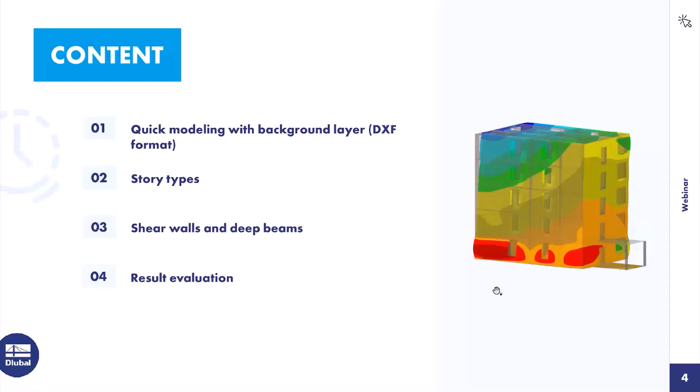Okay, then to our first chapter, the quick modeling, here with a background layer for an easier way. I will import a DXF file, and it's a modeling option from bird's view, floor plan, top view, however you want to call it.

At the time we have added this button in the building model add-on. It's an exclusive button, and you can see the objects you can generate or model in this bird's eye view.

So then let's switch to RFEM 6, then I can show you what I mean. I start a new model. Let's call it a building model. And at first we must activate the add-ons, of course the building model.

And today also the concrete design, so I can show you the configurations and special options which are connected with the building model add-on when the concrete add-on is activated.

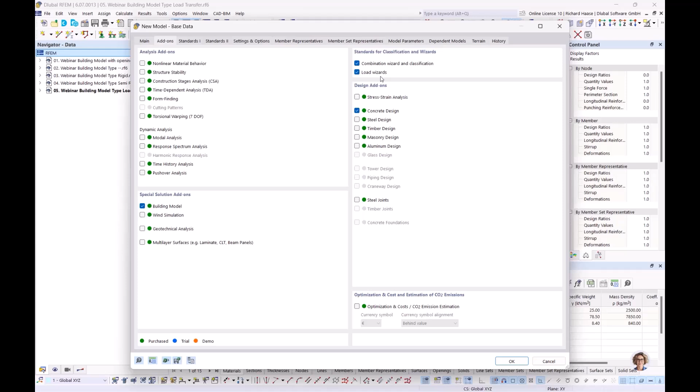And for the quick modeling, I also want to show you our load wizards. For this today we want to choose the German annex.

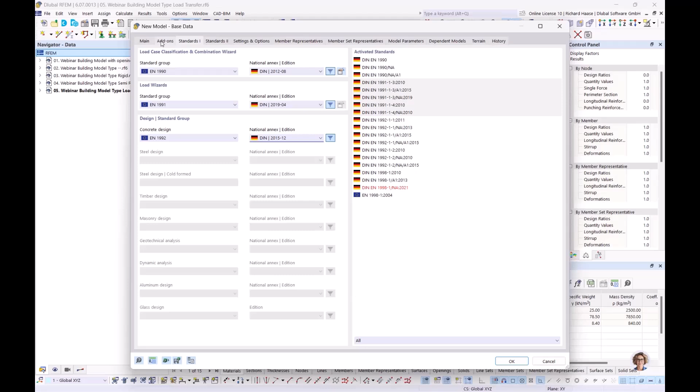Okay, so when you activate the building model, automatically here under settings and options, our surface cells are activated, and this is a nice feature for surfaces which are, let's say, separated by lines or different parts, and you can control and modify the surface cells. But yeah, I will show you. So okay, then let's start with the new model.

Okay, then let's delete all objects so that we really have a new model. Let's start with the materials. There I need a concrete at first.

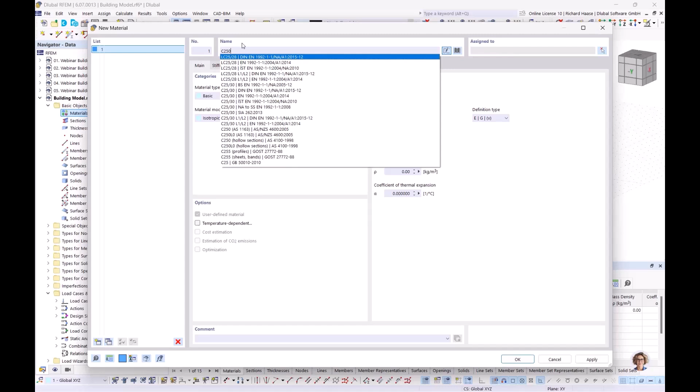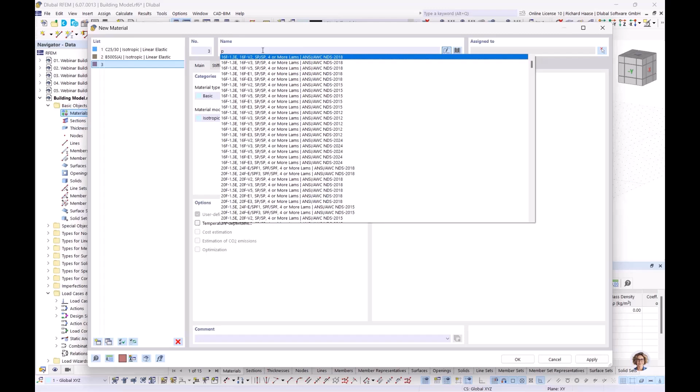Let's take C25/30. Then we need reinforced steel, let's take B500. Okay, and also we need masonry, there let's take... okay, this one. Okay, then we have defined our materials.

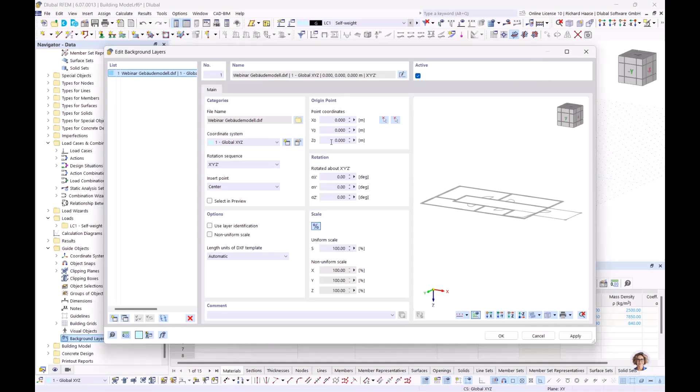Yeah, and okay, then I will upload my DXF file, my background layer, so I can show you what this building is about or how it looks like. Okay, and now we see it's nothing big. It's a simple model, but yeah, for this case it's good.

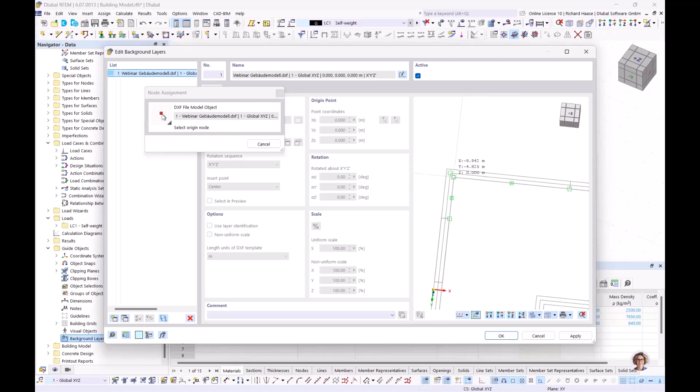Then let's change to meter. And when you add some background layers, you have here two selecting points. The first you can choose, I will set it here to the zero point, and the second you can choose in your DXF file. I added here some statical system lines. I will choose this line for this.

Now we have our DXF background layer, and the walls on the outside should be in masonry, and the inner side walls I will create in concrete. Also this slab, not really cantilever, but it's only in the ground floor. And here we have some columns.

So then let's go back to our definitions at the beginning. Materials we have defined. Now let's define our section. For the column, it's concrete. And now I will show you also a nice feature.

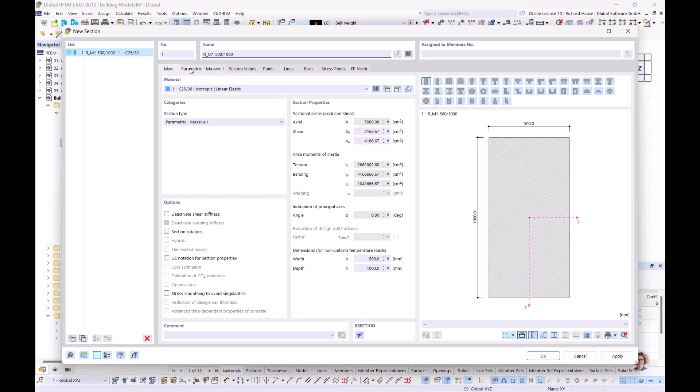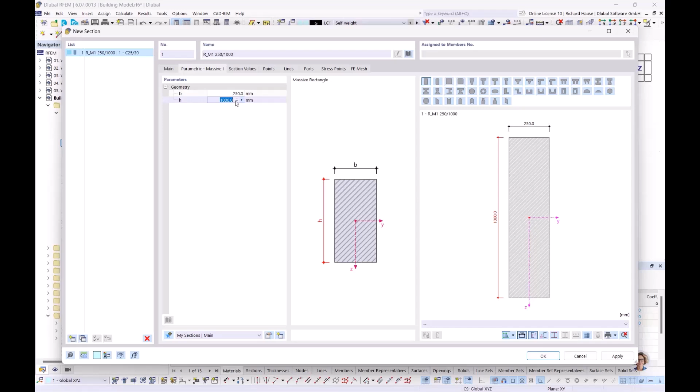When you work with your DXF file, you have the option to measure the properties of the section. So let's take this - 25 centimeter, and also in the other side, also 25. Okay, then let's say okay.

And now we need some thicknesses. So maybe let's start with the masonry walls. And also we have here the same type. Okay, then let's choose this 24.

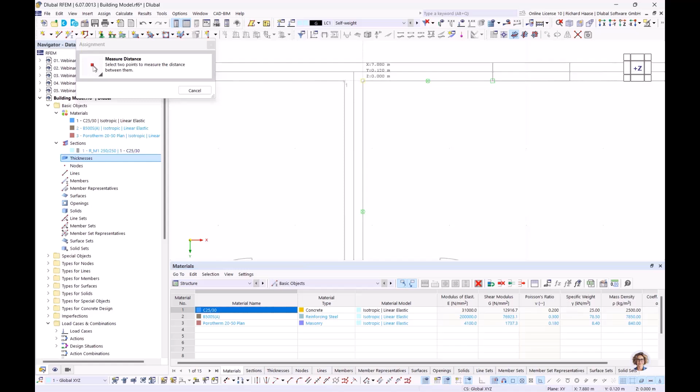For the walls on the inner side with the concrete material, we can do here best way 24. And for the foundation plate, let's say we want to have a thickness of 35 centimeter. Okay, then let's say okay.

So we have defined the materials, the section, the thickness, and now let's go here. Then we must switch to the building model add-on, and we will define now our building stories.

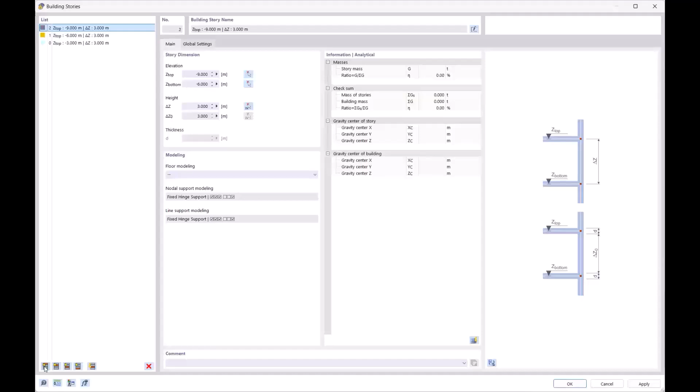Wait, I want to - okay, a new one with a height of 3 meters. And now again 4. And yeah, you also can model at first, but because of this fast modeling, you need to define the stories at first.

And you can switch here, and now you see story heights here. And here are the floor modeling options, but I will show you at a later point. So now we have our materials, our sections and thicknesses, and defined our stories. And now we can start to define with the fast modeling.

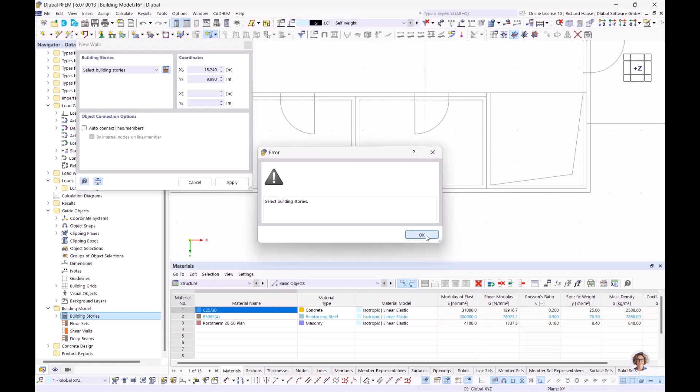So let's start with the walls. Let's take here our masonry material. Oh, yeah, right - for this, you need to define the stories. So you can choose if you want these walls in this example only on one floor or on different floors, or in our case, we want to have these walls in all stories. Then apply, and let's start.

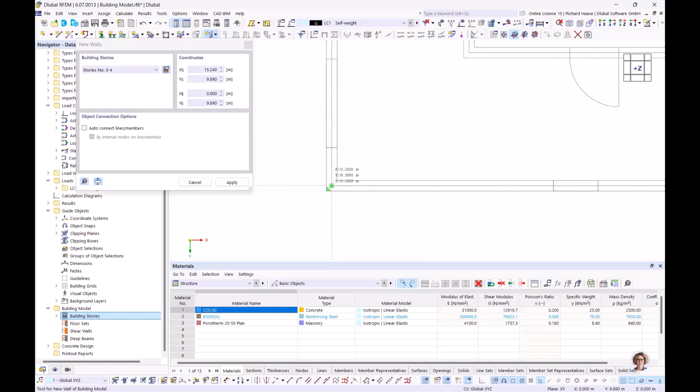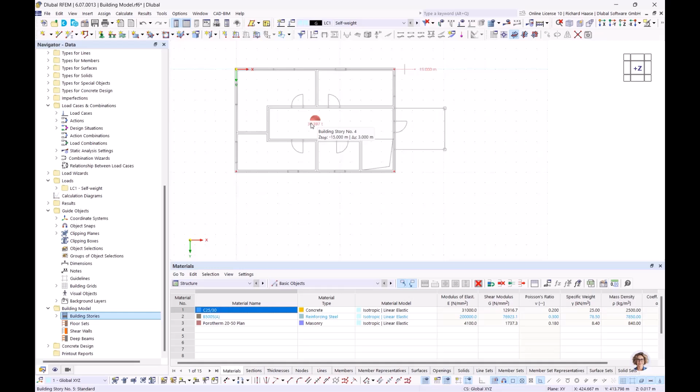So now you see here this mass, and it's also because of the building model add-on. The add-on now creates a center of mass, and now all these masonry walls are added with their mass, for each story. So you see now all outside walls are created, but let's continue with the inside walls.

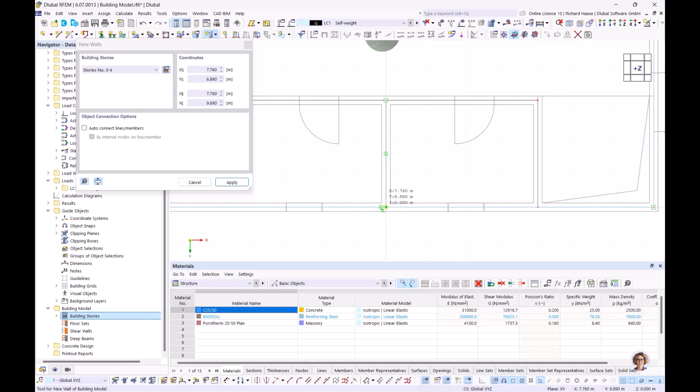24, yeah. Okay, here and here. Here and here. And the last one is here. Okay, let's check if I get all walls. Yeah, it looks good.

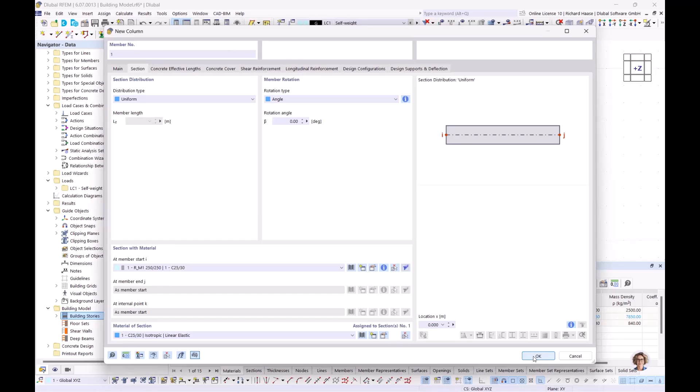Okay, then we want to define our columns with our section we have defined before. And now we don't want it in all stories, only in the ground floor. Apply and click here and click there.

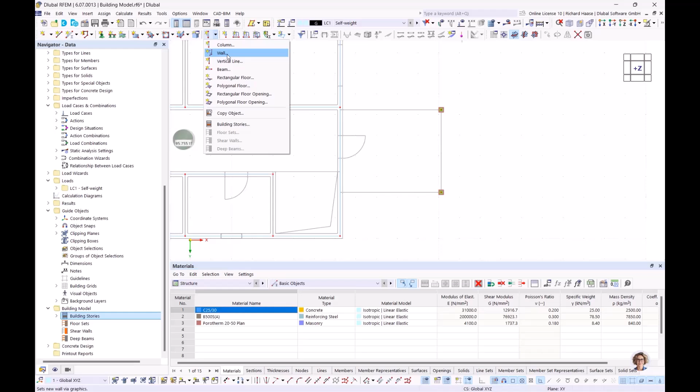Okay, then same procedure for the floors. So 24, okay. And for all stories, apply. Oh, a moment, that's wrong.

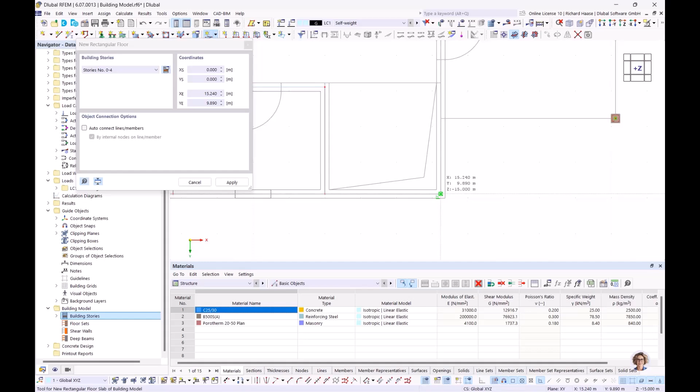Okay, again - floor for all and apply. And yeah, okay, now we have also floors.

Now we need this cantilever floor. Okay, also 25 and only in the ground floor. Let's start at this point.

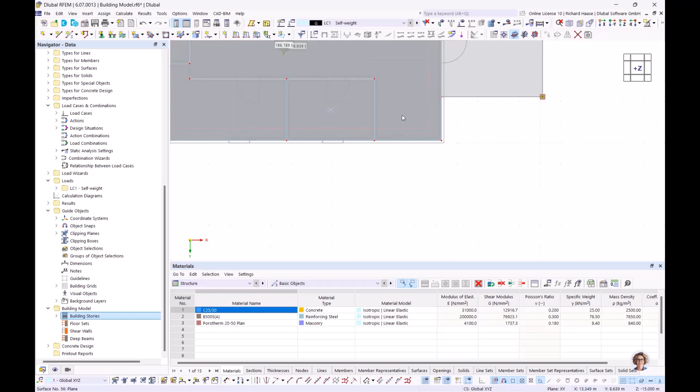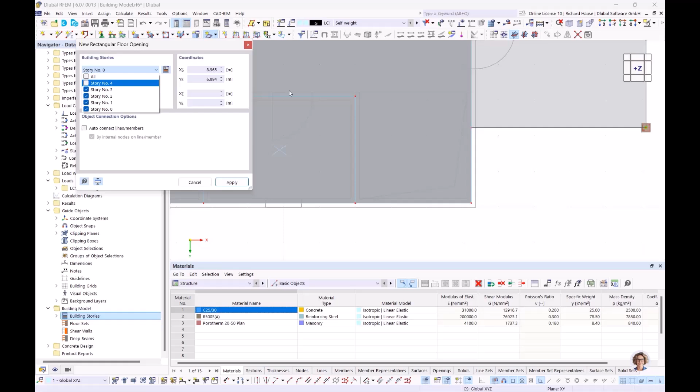And here we have an opening in the floors for stairs. And let's define this floor opening. Here, let's see, not in the last floor. And okay.

Okay, so now we have our openings, and you see you have in a short time generated a building. The only thing you must generate manually are the openings - the windows and the doors, for example, or other openings in the building.

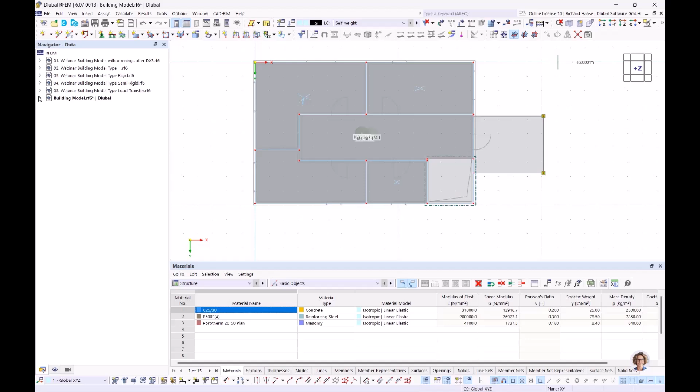And to not waste time, I have modeled this here. Maybe I can switch back to the full model. And there you see the openings.

And I added also some load transfer surfaces, because imagine when you define wind loads and you define it only on the masonry surfaces, these areas for a closed model are missing at the end. So you can define these load transfer surfaces, and these surfaces only transfer the loads to the sides, and don't have a stiffness effect or such thing, only for load transfer.

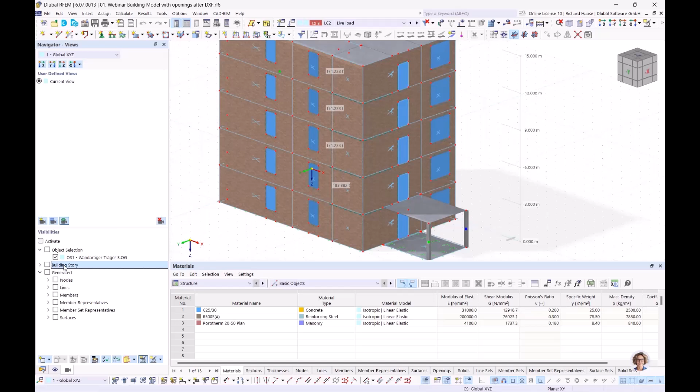Okay, then another nice feature which the building model makes automatically is in the navigator views. There is a point Building Story, and when you activate this, you see every story you define automatically creates a view, so you can fast switch between the stories for loads and such things, and I find it's a very nice feature.

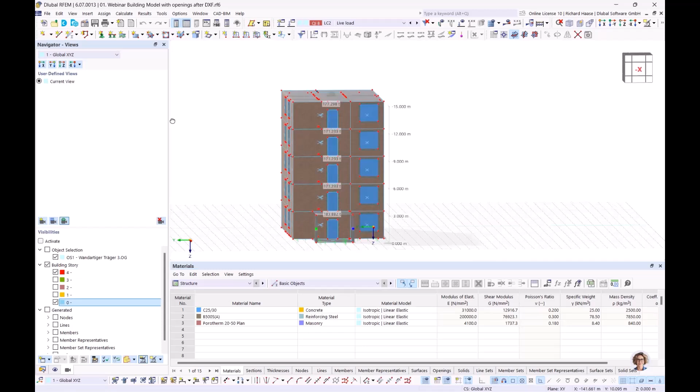Okay, then what I want to show you also - for example here you see it's one big wall, and you see these blue crosses. Wait, maybe we change the view. Oh, it's not functioning how I want it.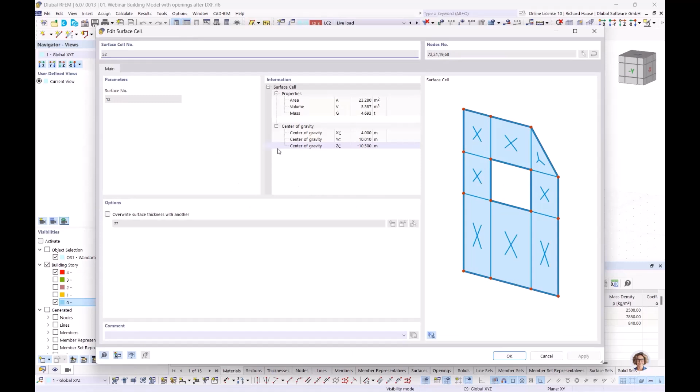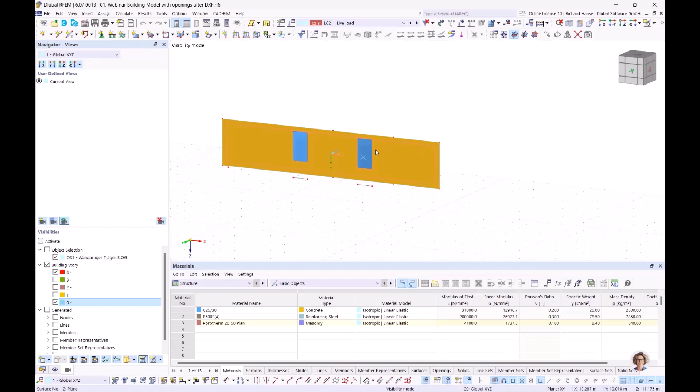Yeah, you have only one big surface, and with these surface cells you have the option, when you click on the surface cell, to give these cells other thicknesses. Then with the different thicknesses you can also design the surface as one surface, so it's nearly the same effect as with the surface sets, but it's an easier and faster way to define this here.

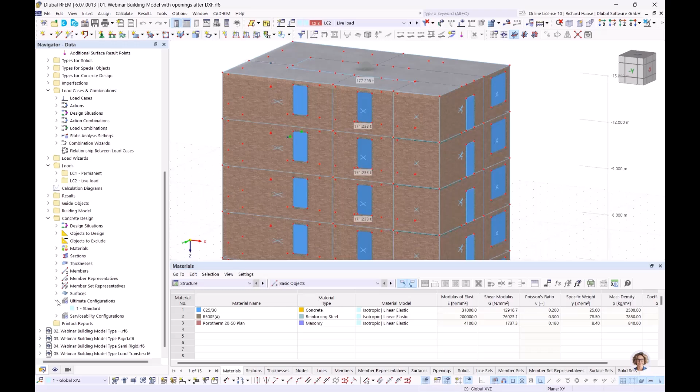Okay, then I want to show you the concrete design. When you activate the Building Model add-on and also Concrete Design, you find in the configurations some additional points which are only possible with this add-on. Here are some options for the deep beams and for the shear walls. So that's now possible.

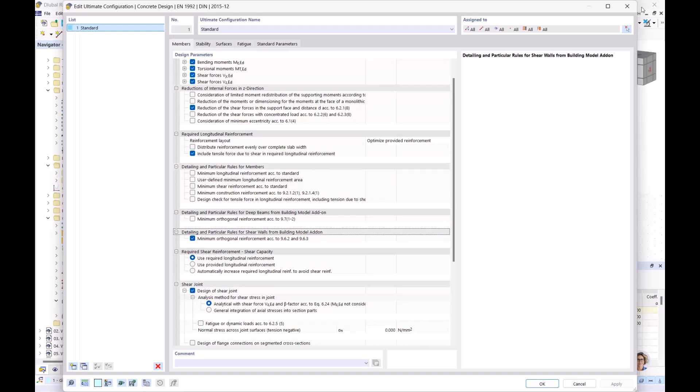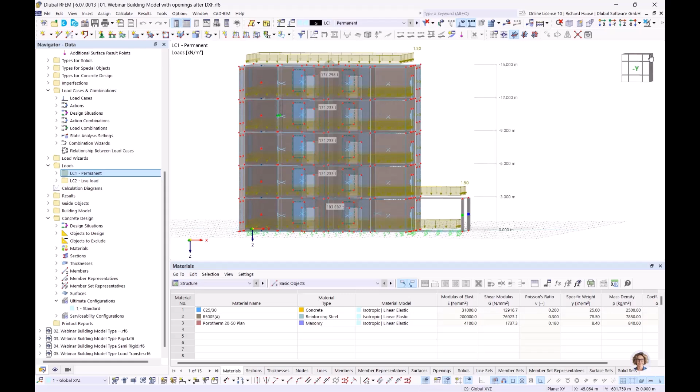Okay, then, as I told you before, maybe we switch to the loads. Sorry. Here we have some permanent loads, nothing special, and here some live loads. And now I want to show you the easy way to define wind loads with our load wizard. We find this here, for example our wind loads, and we have a flat roof, and now we want to find the base corners.

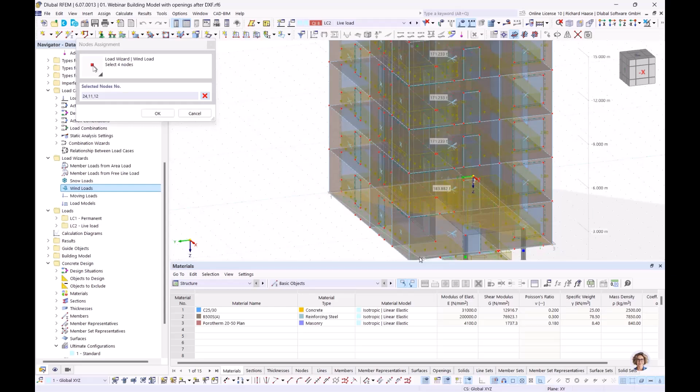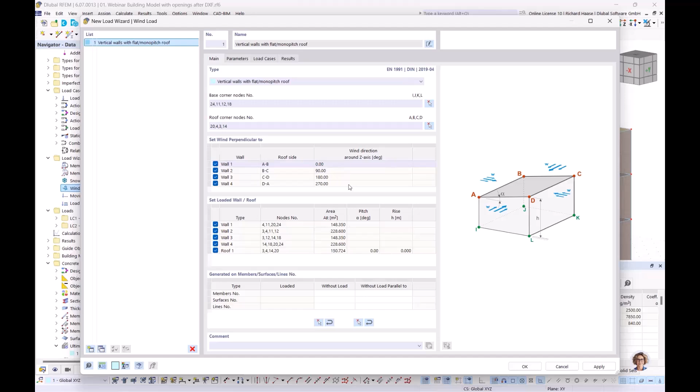Okay. And also the roof corners. Okay, and now you see all walls are automatically detected; RFEM automatically sees the needed walls and roofs. And another nice feature is the definition type with map and parameters.

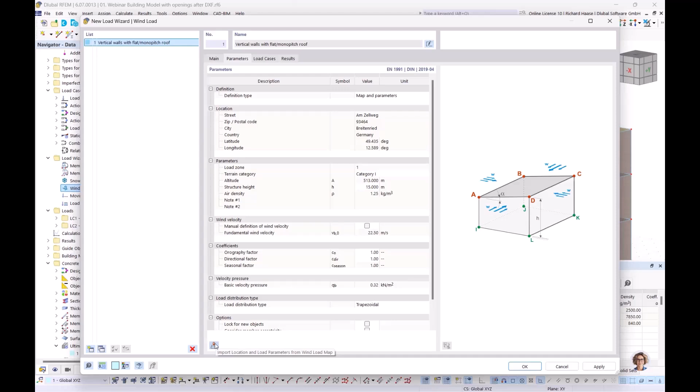That's why I switch to the German annex, because you need this national annex to select the location on the wind load map. So, for example, let's choose the headquarters of Dlubal. It's here in Tiefenbach.

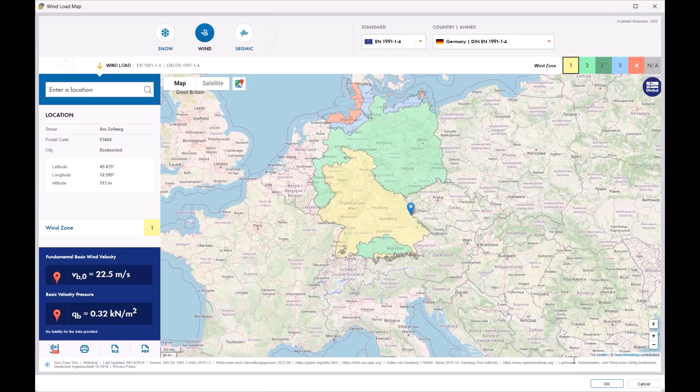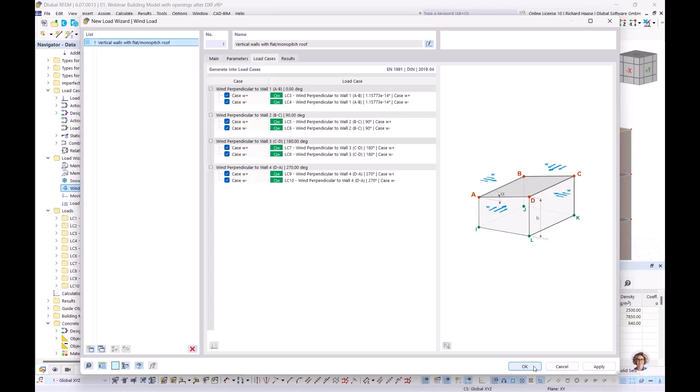Okay, let's say okay, and you see the program transfers information from these wind load maps: the terrain category, load zones, and all information for the wind loads. Also, you can automatically generate load cases per direction. Let's do this here with this button. And you see all directions. Okay. And now we have our wind loads generated fast and correctly for all directions.

And I find it's a very nice feature. The same for snow loads, also with a connection to the Google Maps view. So with these load maps, the same procedure. And then for buildings, you have the snow and wind loads generated very fast. Okay, those are the points about the quick modeling.

Then I will switch back to my PowerPoint presentation, to the second point, the story types. After definition of the stories, you have these 4 types. And what are these 4 types exactly? I will tell you now. But first, independent of which type you choose, you get specific results for mass and story-by-story results. I will show you at the end of my webinar.

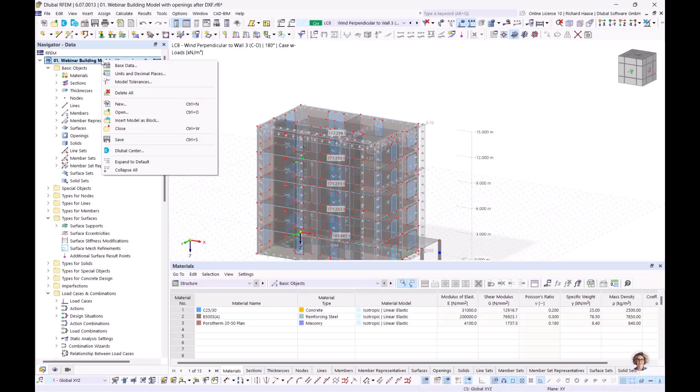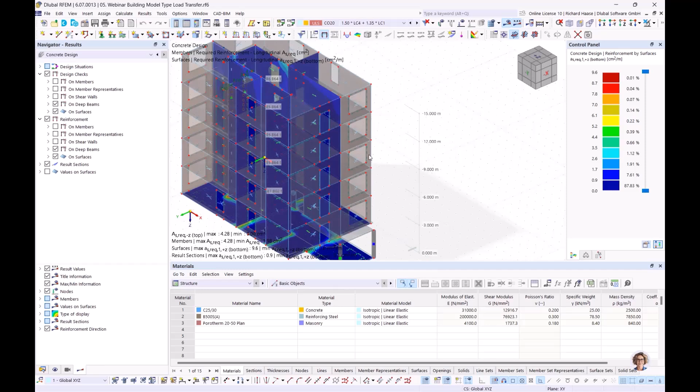So maybe for a better overview, I will close some. Okay, now we have our 4 types. So let's start with our type load transfer, so I can show you what is happening here. So we want the static analysis, and for example, bending moments.

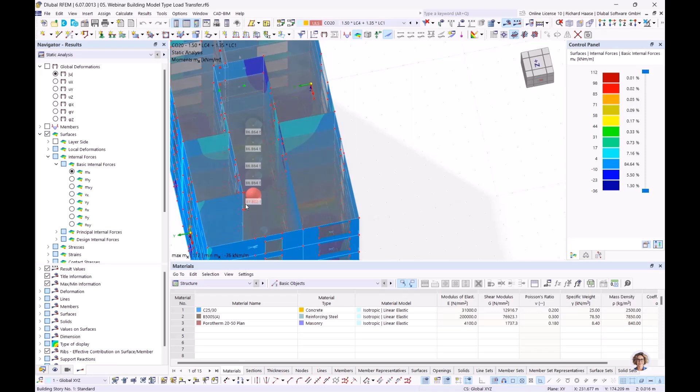And when you see here, we have no moments in the floors, no forces in the slabs, only forces in the walls. So here no slab is activated. So really a simple load transfer. So then we can close this too.

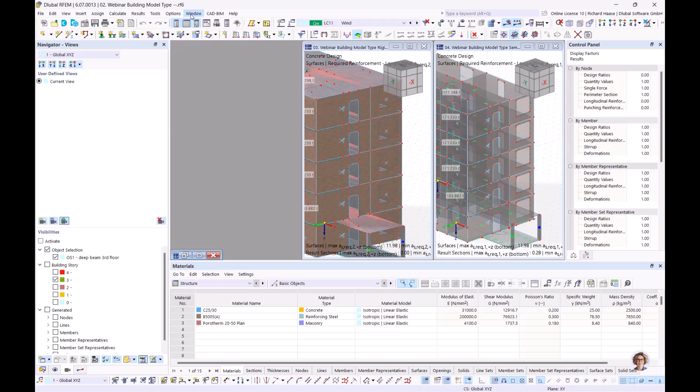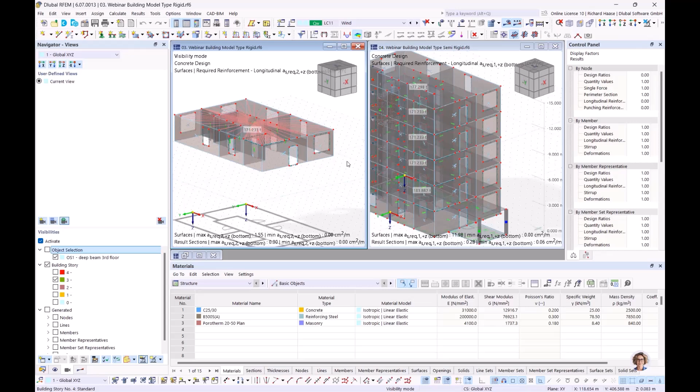And now let's compare this way. Maybe we can minimize this, and again here. So now we have our rigid type, and I choose the 3rd floor, and we want to have the same overview for our semi-rigid, so I can show you the differences directly. Wait, one moment. Why is it still activated? Okay, then let's choose a load case with wind and self-weight for both.

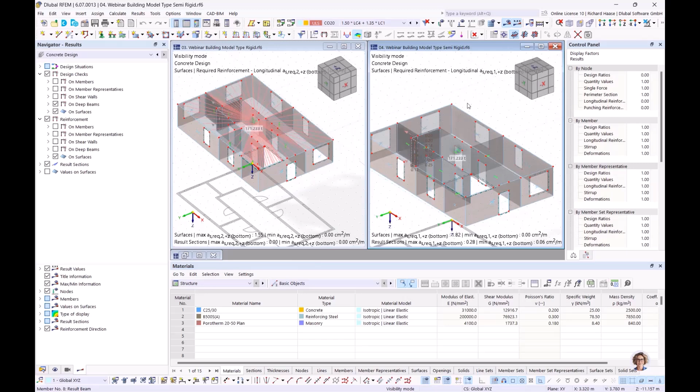So when we now switch to the static analysis, we have here an additional point, analysis of building stories, and this analysis of building stories is only possible with the type rigid diaphragm or semi-rigid diaphragm. So let's look at the floors first. Let's switch to isobands. And here we need also MX.

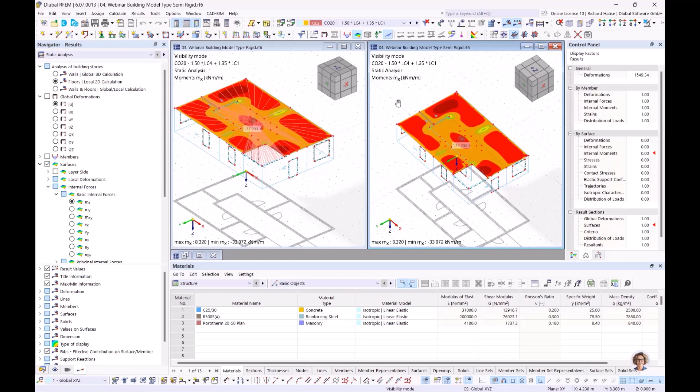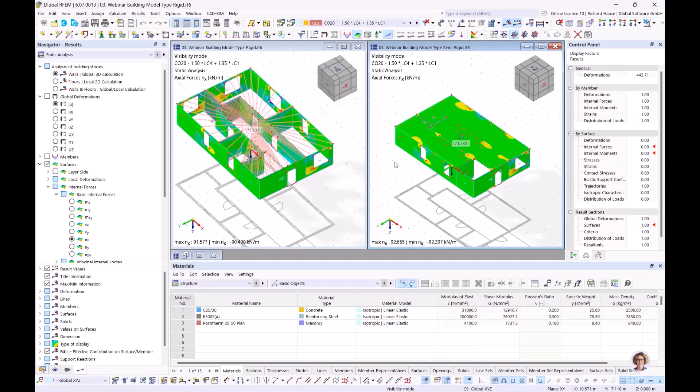In the rigid type, the slab is here with infinite stiffness, and doesn't have an effect on the calculation for the walls. So the walls stand alone more and more. And here in the semi-rigid type, the slab also has an effect in the 3D calculation of the walls. Also for the deformations, you can see it here.

So here we have only 1.8 because of the stiff slab, and here with this softer slab, through the real rigidity of the slab, we have a bigger deformation. And I call it the traditional structural analysis, so calculation with positions in statics, and you can see it.

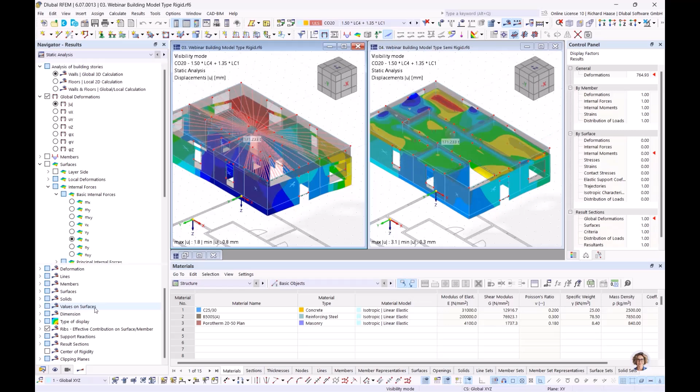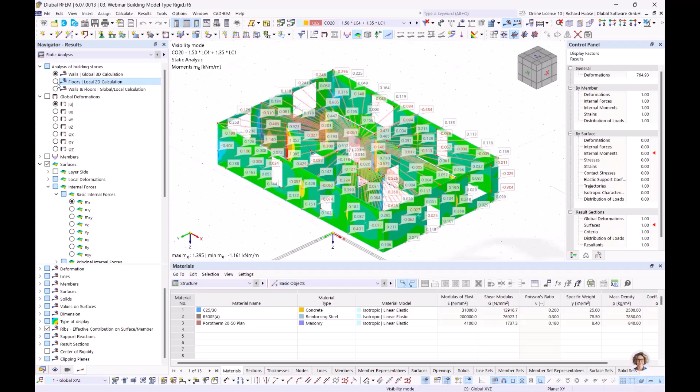Let's activate the values on surface. Let's again switch to X. Let's make it this way, we see it better. So the walls here have 0.238, and the floor 1.005, and these walls and floors are only a result of walls and floors separately. So here we have our 1.005, and here our 0.238. So you see it's independent, they're not affecting each other. That's the rigid type.

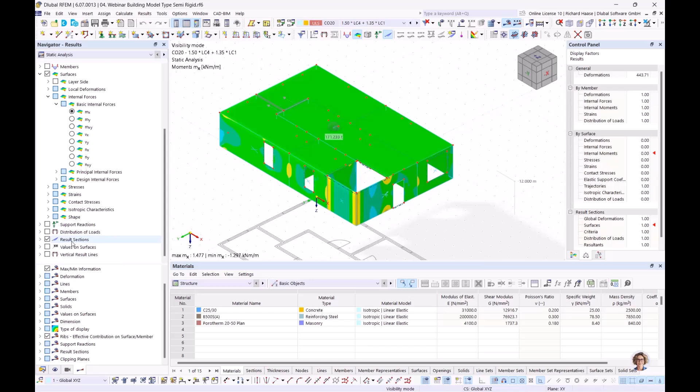Then let's switch back to our semi-rigid. Let's go here maybe. Surface 5.8. Here you see we have a difference in the global deformations. So we have here deformation 3.1 and here 0.3, and here it's a mix of both. So the results are working together, let's say in this way.

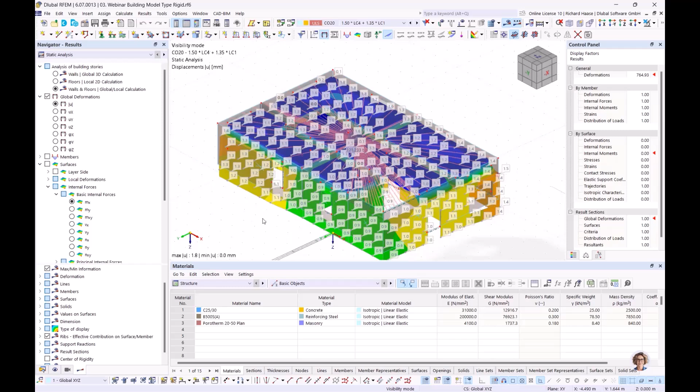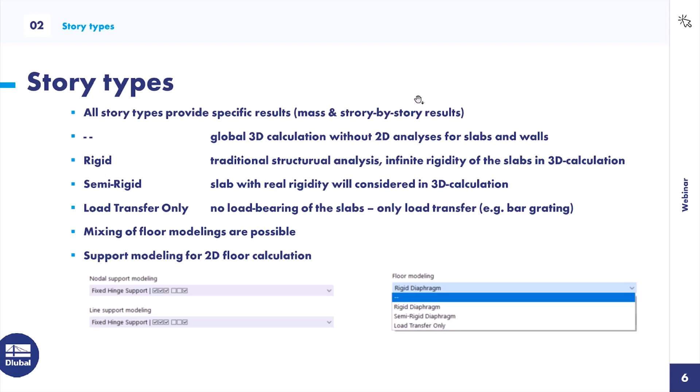And again here to rigid with the deformation. Sorry, this is a better way. So here we have for the walls 1.8 and for the floors 0.3, and this shows only the maximum of one of these, and it's exactly the 1.8. Okay, that's it for this point. Then I will switch back to my PowerPoint presentation. The shear walls and the deep beams.

Both objects you must define manually and choose the surfaces or surface cells, or you can also choose members to define these objects, these shear walls and deep beams. And both objects automatically generate a result beam, which is an integration of surface forces into member forces.

And you also have the option to generate result sections, and result sections create an intersection line, and on this line you can see results in this area, let's say. And important for deep beams is to consider nonlinear calculation, or the forces which come through this surface type.

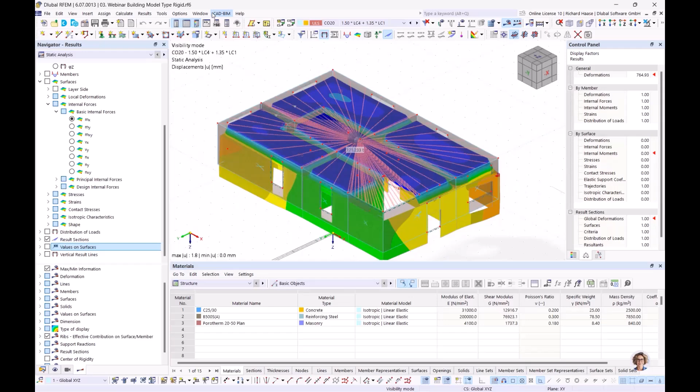We also have a knowledge base article on our website for deep beams, and there you can read it again, and the effects are explained there in more detail. Okay, then let's switch back to our RFEM model. I will work now with this type and want to show you how you can define shear walls and deep beams.

So I have modeled it before, but you can create a new shear wall, and you must assign objects. I have chosen surfaces and cells. Wait, then let me show you the shear wall. It's a wall from the ground floor to the highest floor,

and then when you activate the design add-ons, in this case concrete design, you see here the typical tabs you can also find in every other concrete design object. You can define shear reinforcement, longitudinal reinforcement, and all the other definitions. Okay.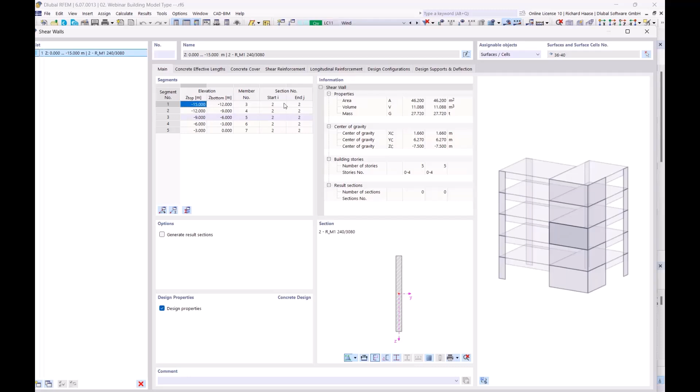Also, regarding the definition of the reinforcement, I must say when it is a simple wall, in this form, or I'm not 100% sure, but for example some other simple geometries, it will also be possible to define your reinforcement. But when you have a completely individual form, it is not possible to create such reinforcement in RFEM 6, but we have an option here with this button.

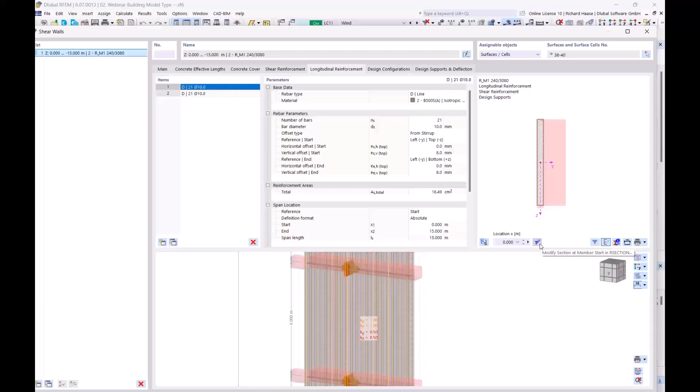You can open RSECTION and export your individual section from RFEM to RSECTION. Then you can define there the reinforcement you want, and send it back directly to RFEM 6, and it is updated here, and then you can calculate it with your own defined reinforcement. That's a point I wanted to make. Okay.

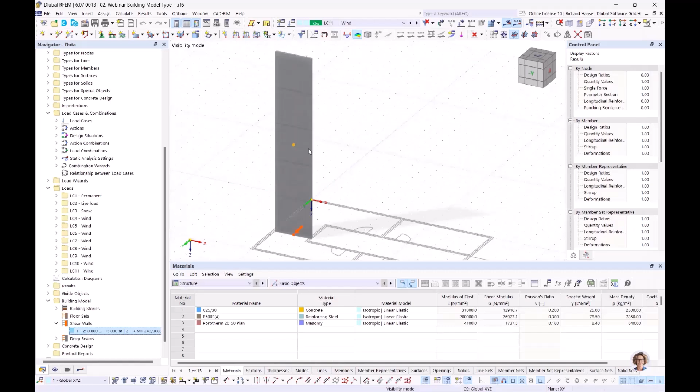Okay, we are in the concrete design, and you also see we have here additional object types, shear walls and deep beams, and also in our concrete design we have design ratios and reinforcement for shear walls and deep beams. So you can see here, like for other objects, calculations and the results for analyzing.

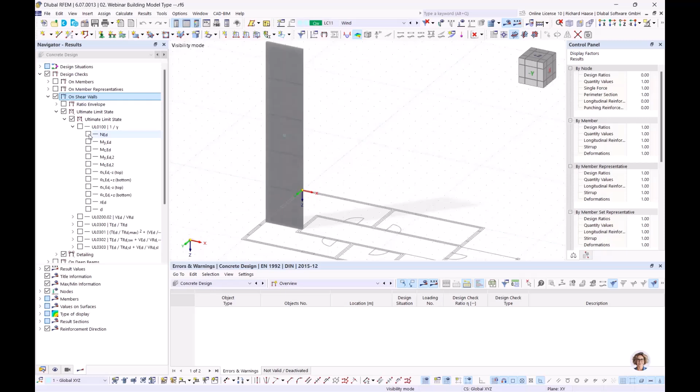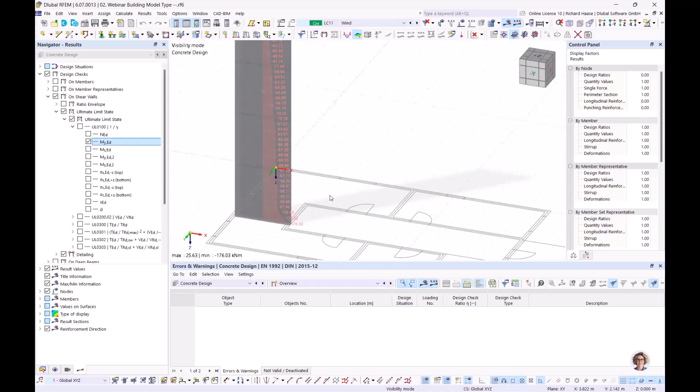Okay, but a big point for these shear walls, you also have it in the table, but I will show you in my next chapter. Here, for example, you see the axial forces you get per story, and the moments, and it's very good for controlling and for seeing which forces are here.

Okay, then the same procedure for the deep beams. Sorry again. The deep beams you can define the same way as the shear walls, and here I generate result sections because, as I told you before in the PDF presentation, you should look at the height to length ratio,

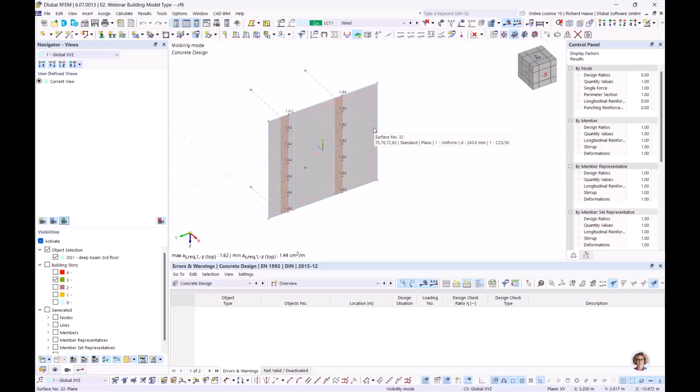and I want to show my deep beam. I have created my own object selection for this, and I have very few loads, so this is only construction reinforcement. Normally you have more on the bottom side, but I only want to show you the workflow, how you must work with these results.

Okay, so when we look at the reinforcement on our deep beams, no, sorry, we need a surface, of course, because the deep beam here is our result beam, but because of the height to length ratio, we must do it over the surface with result sections.

And you see in this direction it shows the required reinforcement on the bottom side, where you have the steel tension you need. So remember, it's one direction, and the second direction is for the shear reinforcement.

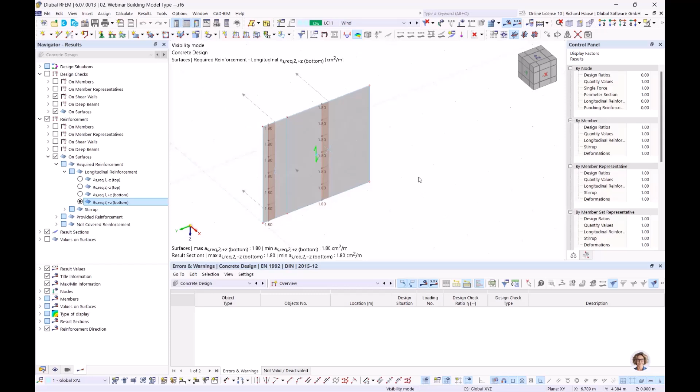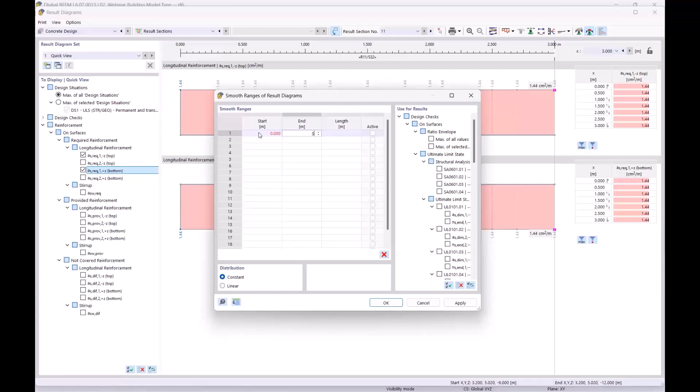So when we look at our result diagrams, let's remove all and go to here, 1, 1. Then we have these results here. Now we must define a smooth range over the whole length. So we have 3 meters constant, and now we have our result.

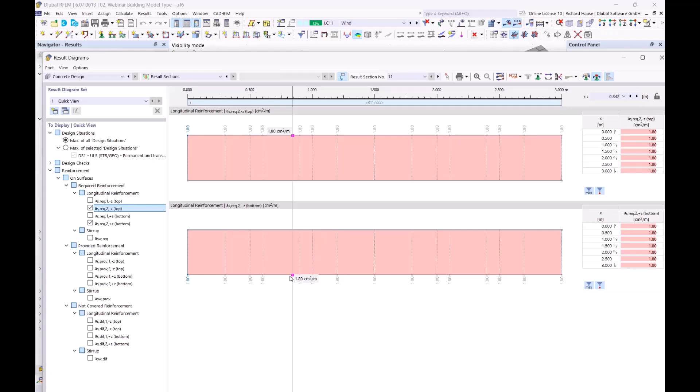So we need this 4.31 plus 4.31. So we have a sum of 8.62, which we must put into the bottom side of the deep beam, and the shear reinforcement: we look at both directions, top and bottom, and choose here the maximum value. Here it's every the same because we don't have big loads, but we must choose this 1.8 for the shear reinforcement, and that's the workflow we have at the time.

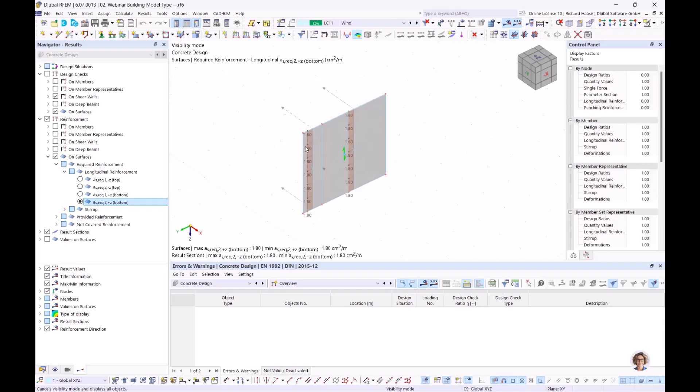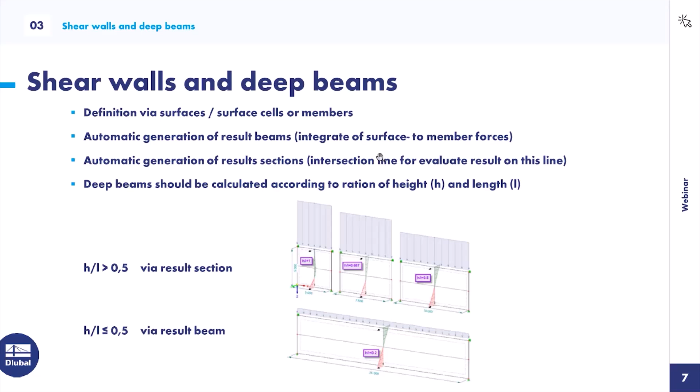Okay, that was about shear walls and deep beams. Let's cancel this visibility and switch back to the PowerPoint presentation, to the last chapter, the result evaluation. When you click the static analysis here, you have this point, results by stories, and you have these 5 tabs: the center of mass and rigidity, story actions, interstory drifts, then forces in deep beams and shear walls. Maybe it's easier when I show you in the program.

So let's switch again to RFEM 6, and go to the static analysis and results by stories. Let's start with the first tab, the center of mass and rigidity. The mass shows the mass per story. You see it's nearly the same here. Only the ground floor has more mass because of our foundation plate. And out of these masses, RFEM shows you the mass center for every story.

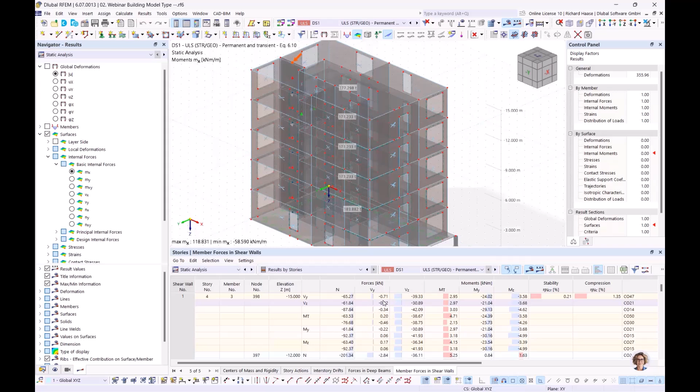And also here about the deep beams and shear walls, you can see the results of the result beams which are created for the deep beams and the shear walls. You can see all forces in each story. For example, here the axial forces, you see how they grow every story, as I showed you before in the graphic menu. Okay, that's about these results by stories.